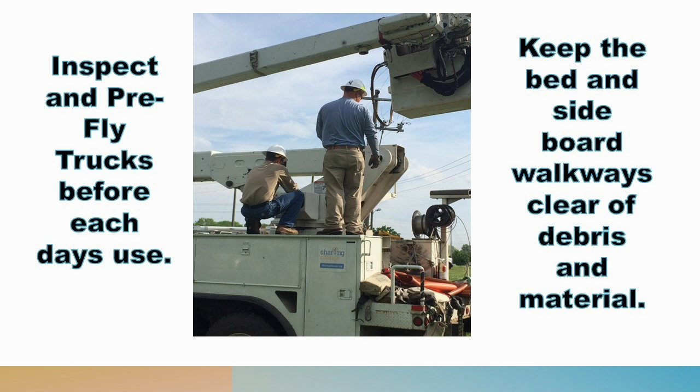When you enter a bucket, you always have to tie off using a harness and lanyard. You want to make sure the anchor or anchorage point is adequate. What does that mean? It has to support 5,000 pounds for a person. You never want to lift or move a lift with the worker elevated. There's been plenty of accidents you can find on the internet where people have been killed and seriously hurt. And as with any piece of equipment, you want to be properly trained so that you understand what you're doing and how to use the equipment safely.

You of course want to maintain your equipment. That means do your inspections, make sure the controls are properly marked, and people understand how to use them. Never override the safety devices for outriggers or anything else, and know the swing radius. Know how to keep clear of that swing radius because you can have impacts with people on the ground or inadvertently hit the bucket against something. We want to avoid that at all possible.

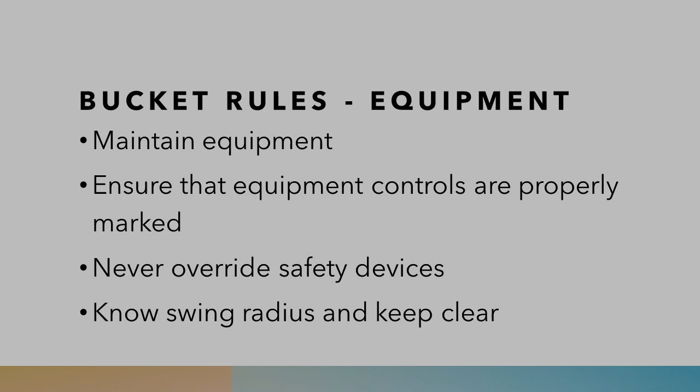Of course, you want to set your brakes. You want to use wheel chocks. Always check your tire pressure, extend the outriggers, use pads, especially on soft ground or in the summer. We all know blacktop, once it gets hot, moves. So we want to make sure we spread that pressure out over a wide area so that we don't have the truck moving. Make sure the lift is level, absolutely level. It's imperative that it's level so that it can function properly.

As far as the environment goes, you never want to operate a bucket truck in high winds. The bucket can act as a sail and tip the bucket and the truck completely over. You always want to make sure that your work zone is as safe as can be, and if you have to set up a temporary traffic control zone, that you do it properly. Always maintain minimum approach distance of 10 feet around distribution lines up to 50,000 volts. Make sure you do that, and take proper precautions if you go beyond that minimum approach distance as far as training, etc.

We want to talk about ladders now. Ladders, you can use them in the field, you can use them in warehouses, you can use them in shops, you use them in office, you use them at home. And a ladder can be a really good stable work platform if you use it correctly, but you can also get yourself really hurt bad if you don't use it correctly.

So you do not want to reach outside of the rails in any ladder in particular. That's where the ladder is the strongest. That's where it has the most stability.

You want to make sure that you do not use ladders in the proximity of live components. If you do, make sure it's not aluminum. Maintain a 3-point contact. That's what tool belts are for, backpacks are for. Once you get up there, have somebody send you something up there, or equipment.

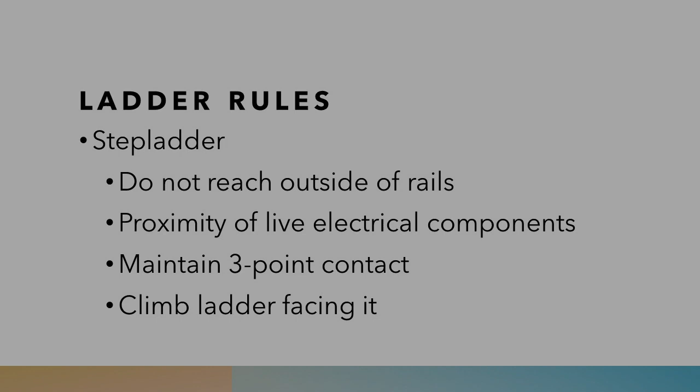You want to climb the ladder facing the ladder, not away from it. If you climb it away from it, there's a chance your heel can dig into the rung and it'll send you flying. So on step ladders, you obviously don't want to stand on the top two rungs.

It creates a lot of instability. You can fall off, seriously hurt yourself, or die.

You do not want to paint a ladder. If you paint it, you can cause problems with the inspection process where you can't see cracks and defects in the ladder. You don't want to leave tools and materials on the ladder where it can fall off and hurt somebody.

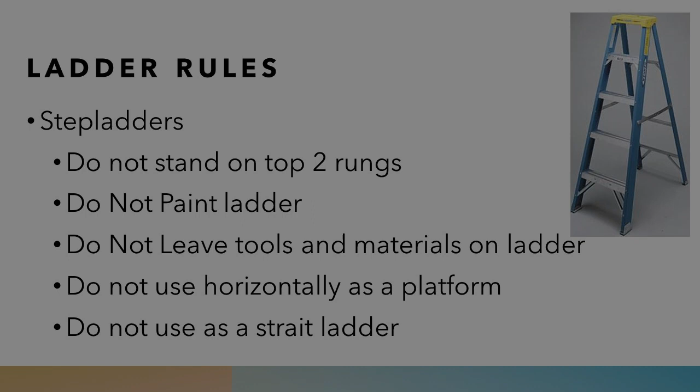You definitely do not want to use it as a pick board, and you do not want to use a step ladder as a straight ladder. It's not designed for that use, and you don't want to use it that way. Proper tool, proper use.

With extension ladders, just like step ladders, you want to know the capacity, the person plus the tools. You want to inspect it for defects. You want to allow sufficient room to step off of the ladder.

What does that mean? OSHA requires that you have 3 feet of ladder beyond the landing area that you're going to get off. So there's 12 inches between each rung, so you need to see 3 rungs.

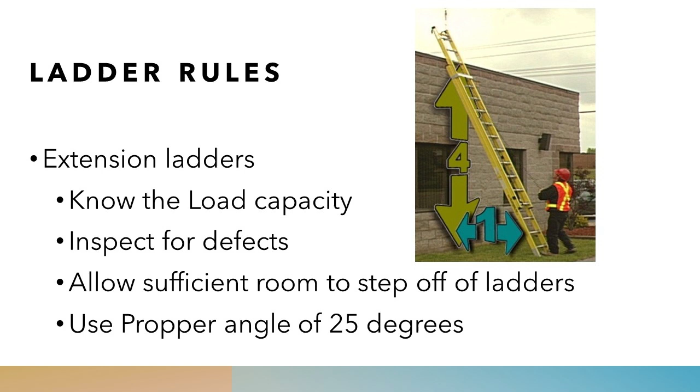You want to use a proper angle of 25 degrees. That's how ladders are designed and engineered to be used, and that's how we want to use them, to make sure that they don't slip out from underneath us or anything else bad happens.

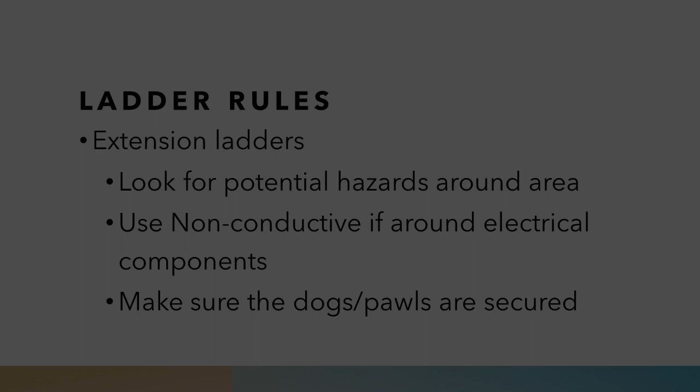So you want to look for potential hazards around the area. What are we talking about here? We're talking about impalement hazards, wrought iron, stakes, anything that if you fell off that ladder and landed on it, it could penetrate your body, or you can hit your head on something and create a serious head injury.

You want to use non-conductive ladders around electrical components, and you want to make sure the dogs are secured and the safety latch is secured. You definitely do not want to ride an extension ladder if those dogs slip.

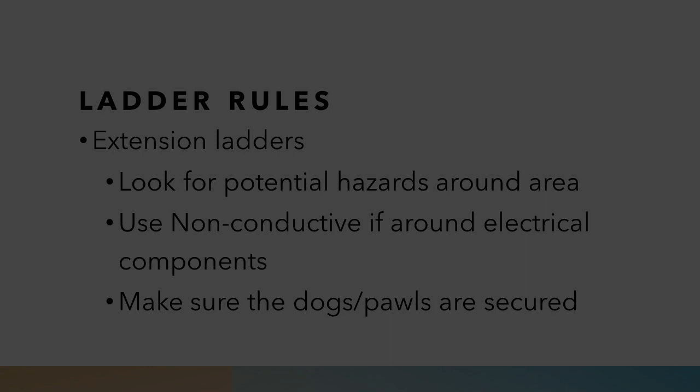You also want to make sure it's on even ground, set up on an even surface. You want to secure it to prevent vertical and lateral movement. The best way to do this is actually have somebody you trust hold the ladder and foot it so that it can't move, but there are other ways you can do that as well.

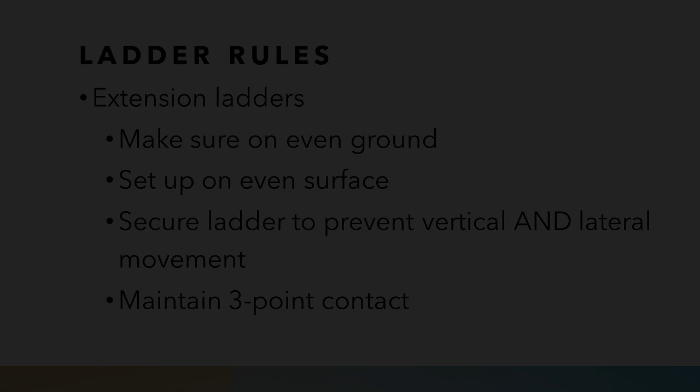So when we talk about platforms, fixed platforms and elevations, we're talking about catwalks, roofs, tops of large equipment, anything that gets you above the operating or normal walking working surface, whether it's the ground, concrete in a warehouse, or gravel. Doesn't really matter what the working surface is made out of, but anytime you're elevated above it, we have to follow some rules.

And so we'll talk a little bit about construction rules and a little bit about general industry rules. It's important to know what you're doing at certain situations.

So OSHA requires that employees be protected from falls from heights. What are we talking about here? If you're doing something in general industry, that's 4 foot off the ground. If it's construction, it's 6 foot off the ground. If you're working from a scaffold, we're talking about 10 foot above the ground.

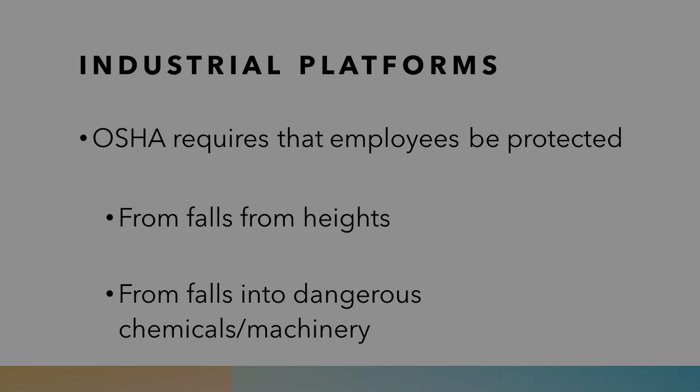You must be protected from falls into dangerous chemicals or machinery. So screw conveyors, chain pulleys, all that sort of thing, as well as any kind of chemical like sulfuric acid or hydrochloric acid, anything that can really hurt you in a bad way, no matter how high away from it you are, if it's on the same level. In general industry, heights of 4 feet or more you need to be protected from.

Top rails need to be 42 inches plus or minus 3 inches. Mid rails halfway in between. Toe boards keep from kicking stuff off on people below, like tools and equipment. Now, what's important here to remember is they're only required to support 200 pounds in any direction.

So these are warning devices. They're warning devices. They're not going to support or required to support a tremendous amount of force. Keep that in mind.

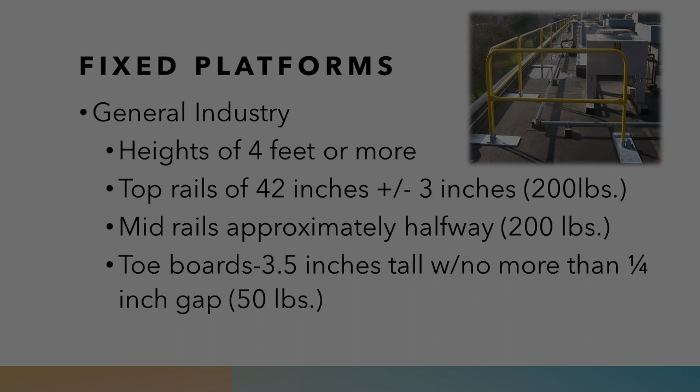In construction, where new work's being done or you're doing substantial removal of pipes or some other obstruction to replace existing equipment and putting new in, they're going to call that construction.

And in construction, as I've already said, if you are 6 foot or more, you have to have some kind of fall protection, whether it's guardrails with a top rail and a mid rail, or a harness and lanyard, or a positioning device. Any kind of fall protection, as long as it's done correctly and adequately, is what is important.

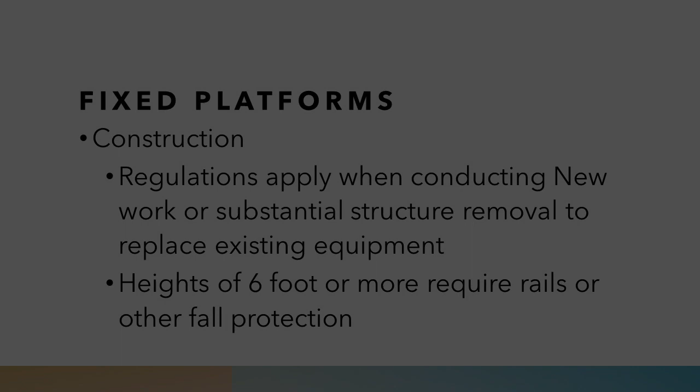Mobile platforms. Bucket trucks are not the only means we use to get to elevated jobs. Each type has specific regulations and fall protection requirements. We're going to talk about those to get you familiar with them, so when it comes time to use this equipment you'll have adequate knowledge to use it safely. That's what's important - safe use. Proper tool, proper job, used in the correct manner, and things tend to go well.

There are basically two types of mobile platforms: scissor lifts and vertical lifts, which typically have a chassis and frame and go straight up and down vertically. That is one type. Another type is an articulating boom, or aerial lift, or mobile elevated platform. These tend to have articulating booms that allow the platform to move beyond the chassis of the device.

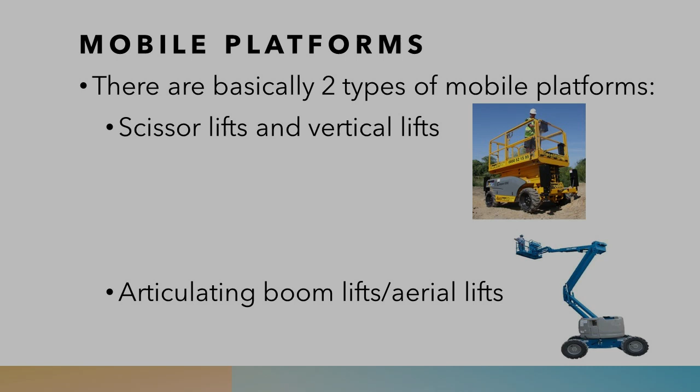Scissor lifts and vertical lifts typically move straight up and down, just like their names. Guardrails are installed for fall protection, and the basket does not move outside the perimeter of the chassis. It's important to know this: if there is not an anchorage point that supports 5,000 pounds, do not tie off to the guardrails. Those guardrails only support 200 pounds in any direction, or are only required to support that. They are not going to support you if you fall.

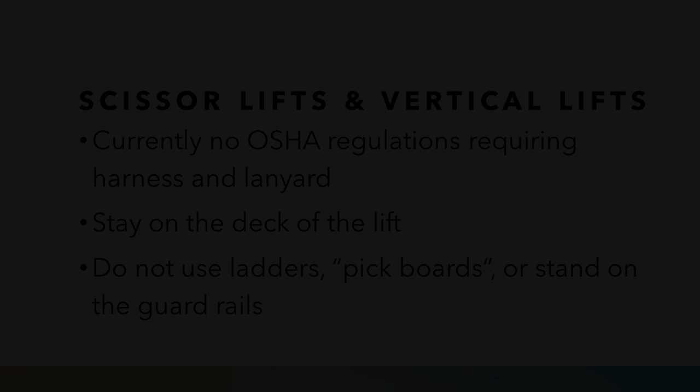For scissor lifts and vertical lifts, there's typically no OSHA regulation at this time requiring a harness and lanyard. Some have been engineered with tie-off points - you want to follow the manufacturer's recommendations for that. You want to stay on the deck of the lift. When you use a ladder or a pick board or stand on the guardrails, you are defeating the fall protection of the guardrails. You're taking a risk and exposing yourself to a fall. So no ladders, pick boards, or standing on the guardrails.

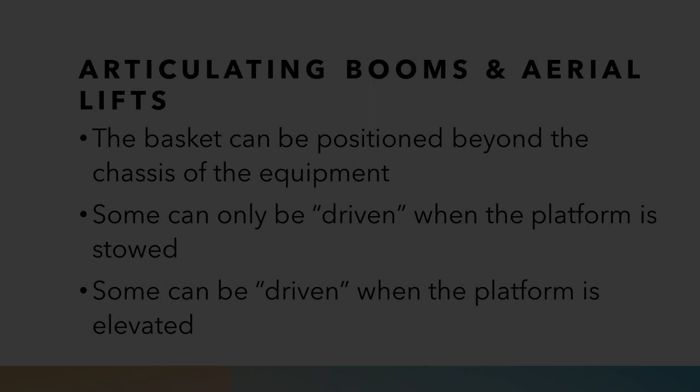With articulating booms and aerial lifts, the basket can be positioned well beyond the chassis of the equipment. Some can be driven only when the platform is stowed, but some can be driven when the platform is elevated. It's important to know that everything that happens on the ground is magnified when you're on that elevated platform and when it's moved outside the chassis. What may be 2 to 4 inches down here may be 2, 3, 4 feet up in the air, depending on how that elevated platform is positioned. So we want to be careful with that.

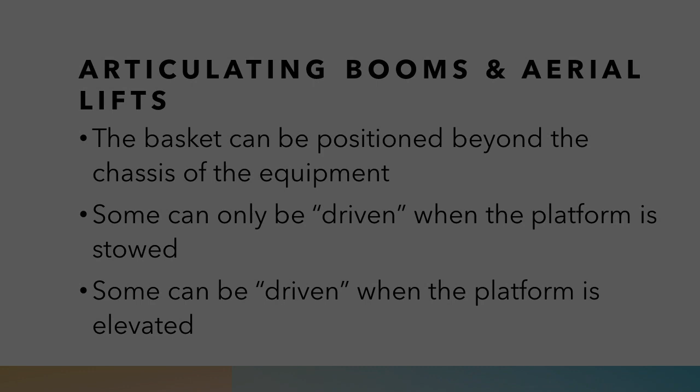For articulating booms and aerial lifts, OSHA 29 CFR 1926.453, paragraph B2-4 states: employees shall always stand firmly on the floor of the basket and shall not sit or climb on the edge of the basket or use planks, ladders, or other devices for a work position. We've already spoken about this, but it bears repeating - it's an OSHA violation, you don't want to do it. You're putting yourself at risk and potentially exposing yourself to a fall if you do those things.

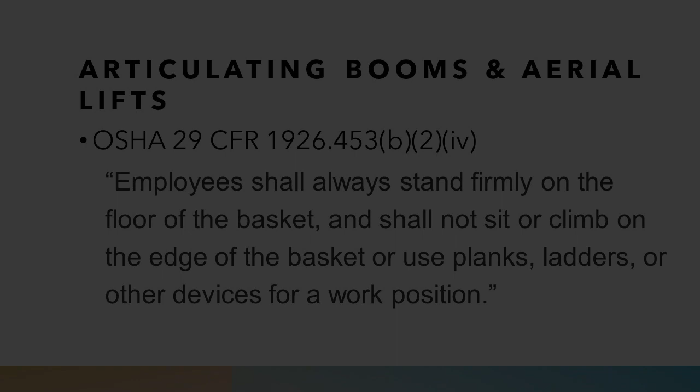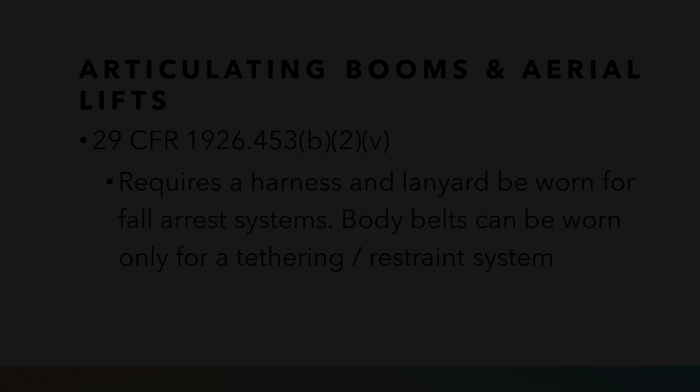29 CFR 1926.453, paragraph B25, requires a harness and lanyard be worn for a fall arrest system. Body belts can only be worn for tethering or a restraint system. The harness and lanyard need to be inspected and attached to an anchor point that has been inspected and will hold 5,000 pounds. Body belts are not used for fall arrest because, when you wear body belts for fall arrest, you are taking a risk - they're never recommended or required for fall arrest because of documented severe back injuries. I encourage people to destroy and get rid of body belts. If you're going to use it for a positioning system like a dog on a leash, just use the harness instead - it doesn't take that much longer to put on, and if you get body belts out of your system, you don't have to worry about someone misusing a piece of equipment.

Why are articulating booms and aerial lifts treated differently? As I've said before, there is a significant risk of being ejected out of the basket - that goes for basket trucks as well. There is an ANSI A92 standard that requires articulating booms and aerial lifts to be manufactured with anchor points withstanding 5,000 pounds per person, so you can't have multiple people attached to the same anchor point unless it has more capacity.